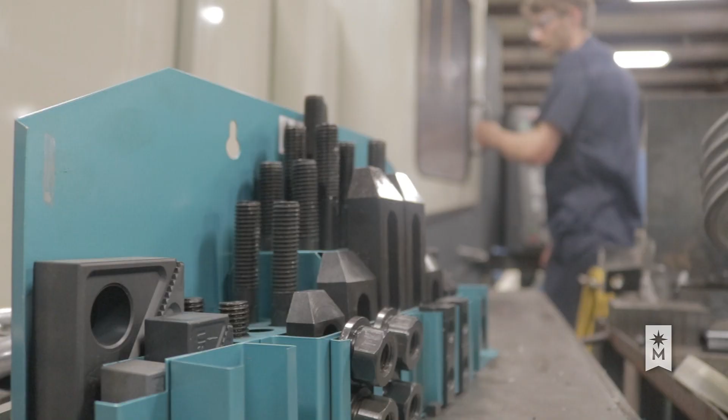We're kind of at the epicenter of engineering and manufacturing. We share a labor shed here, all along the Mississippi River, with southern Minnesota leading manufacturing jobs per capita in the state of Minnesota. The challenge is a lot of the talent leaves and goes to Chicago or the Twin Cities.

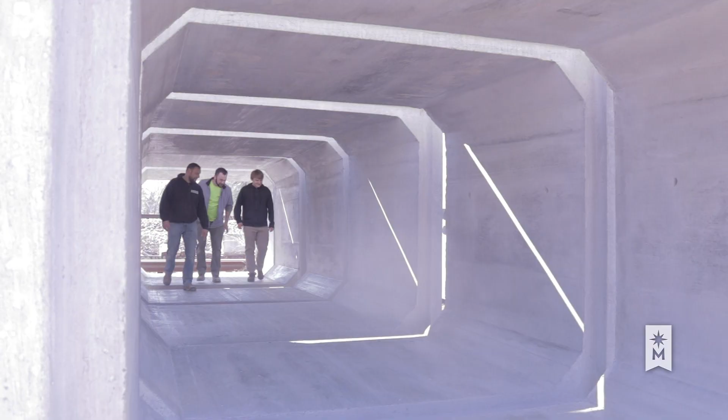If we could come up with a solution that would allow us to work with high school partners, it would allow us to build that pipeline. I want to go into an engineering field, to make connections for our students right here in this area and hopefully have them stay. And I had thought engineering was something interesting and cool that I could do. The Shark Tank pitch was the Student Learner Hub.

This pitch, in the spirit of the television show Shark Tank, your investor panel really are the sharks who will be making a decision about whether your innovation moves forward as one that is recommended for funding or not.

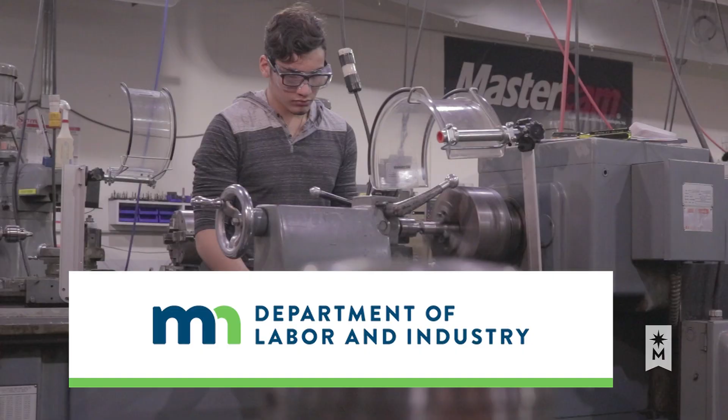We want to create a hub for student learners in manufacturing, which is the program launched by the Department of Labor and Industry in the state of Minnesota, such that our institution can function as a hub for students across southeastern Minnesota, so we could facilitate not only their education, but also a pathway into industry even before they finished high school.

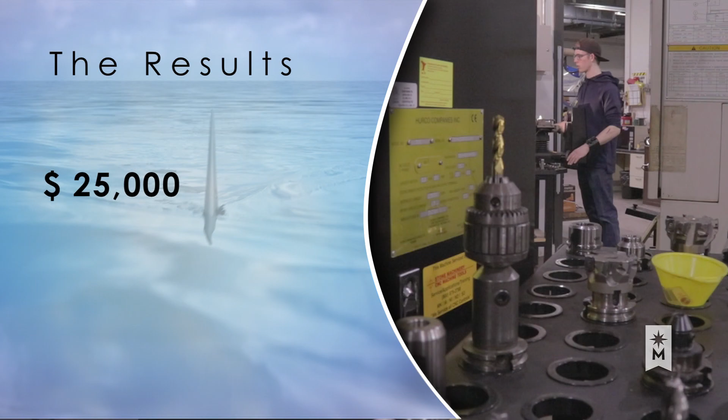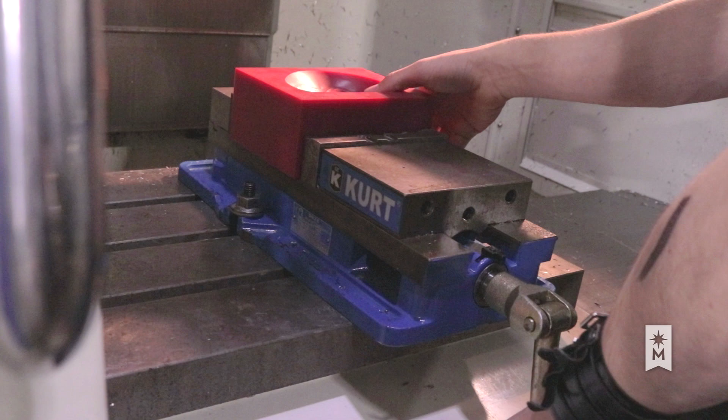We had asked for $25,000 and that was met. The funding primarily allowed us to go ahead and build that coordinator to work between industry, high school, and the college. I reach out to regional employers in advanced manufacturing seeking engineering internships for the students that are in our prototype engineering training program. The high schools are the most important partner with respect to providing us with students.

It is essentially a program that allows our students to participate in coursework at the post-secondary level while they are also a student here in the high school. It's all about finding the student's sense of purpose as well as career development.

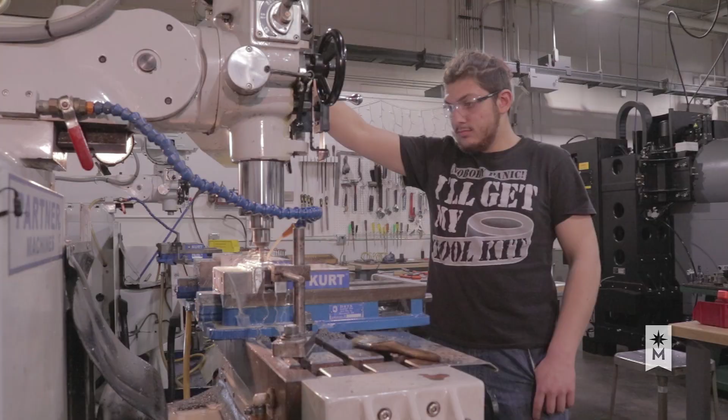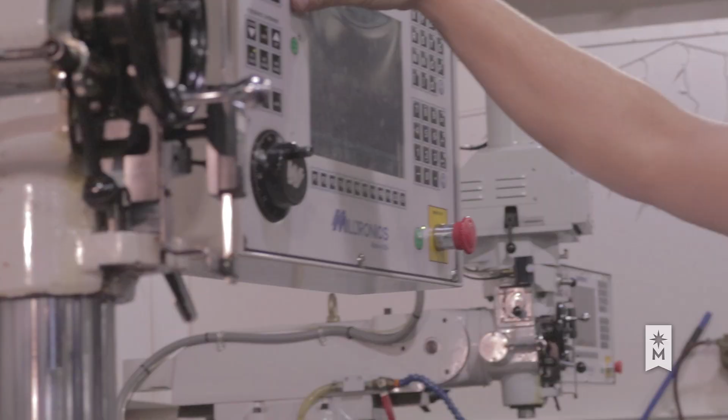Ever since I was little, I've always liked taking things apart and putting them back together. I started the prototype engineering program when I was 15. I get credit in both college and high school. It's a lot of extra work, but I think in the end it'll be worth it.

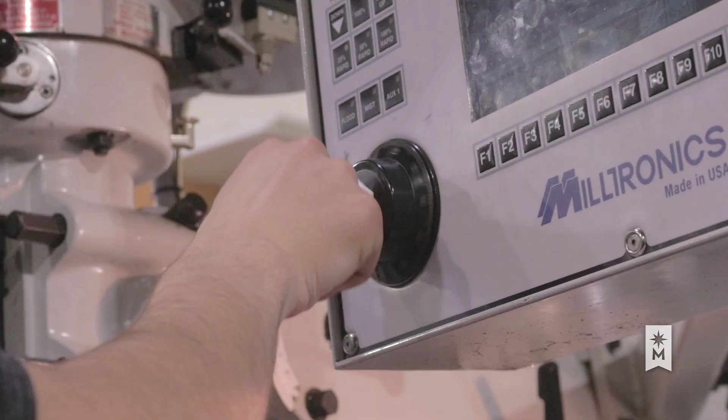The experiences that you gain here are very nice to have because the instructors will really help you get actually hands-on experience, so that looks really good for when you're trying to get employed somewhere. We get to also work with programming, which is really nice, so then you know how to actually do it when you go to a job.

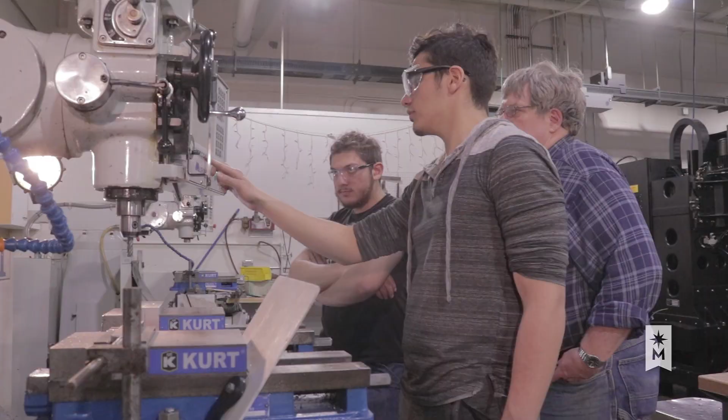I didn't really know what I was going to go into after high school, so this gave me a pretty good idea of what I could do.

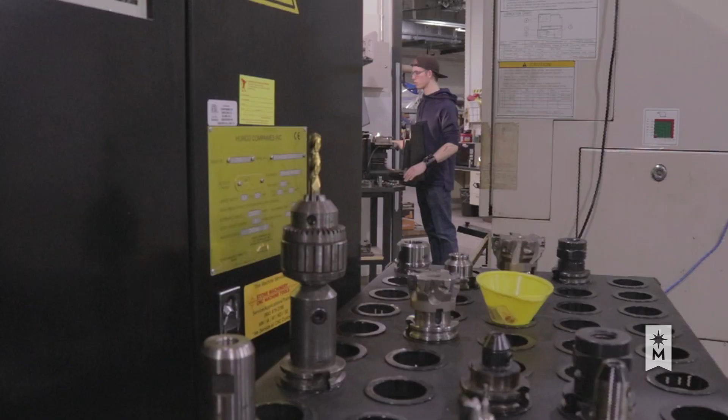So now we're taking these kids, we're cutting down the cost of education, we're cutting down the barriers to entry into college, and then we're saying not only that, but now we're going to facilitate you an engineering internship before you even turn 18. It so happens that La Crescent High School has 4 of our prototype engineering students.

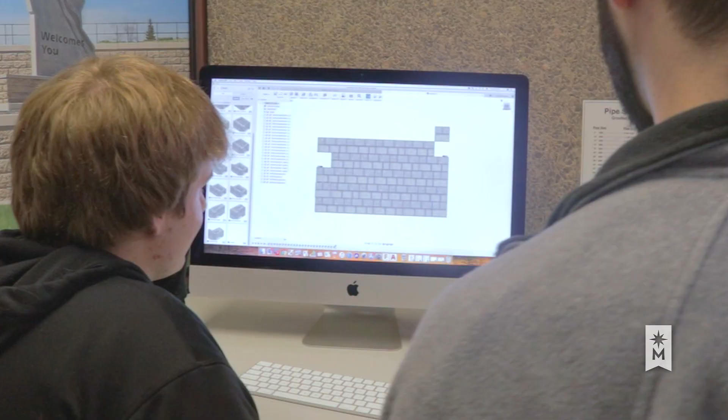One of them we were able to place with Crest Precast, which is a company here in La Crescent. They were seeking an engineering intern to do drafting. Crest Precast is a specialty concrete company. We make precast tanks, vaults, structures. We did the Welcome to Minnesota signs.

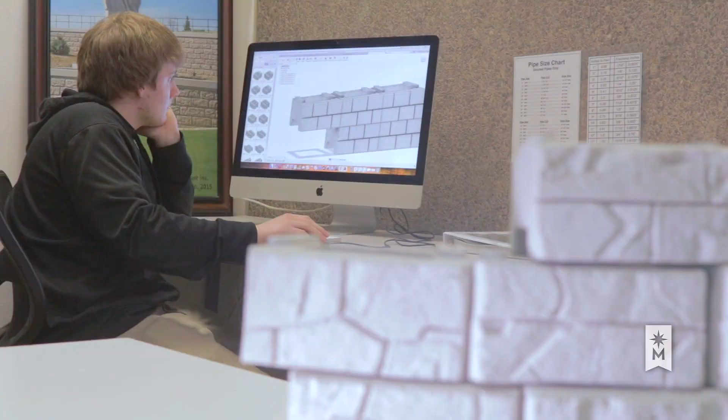We were approached by the technical college to have an intern come in, and they recommended Nick. We had him come in to do some 3D modeling for us, so he's going through and drawing up our standard products. I like thinking problems through.

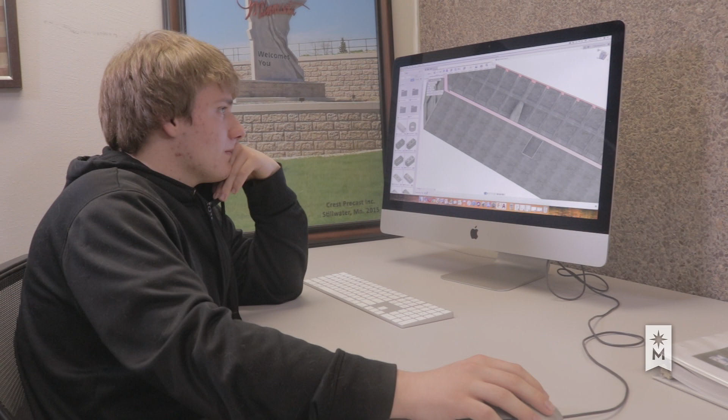We are emphasizing outreach to small and medium-sized companies who are often most invested in hiring local kids. It's great. The money really helps, although I mostly just save it for school.

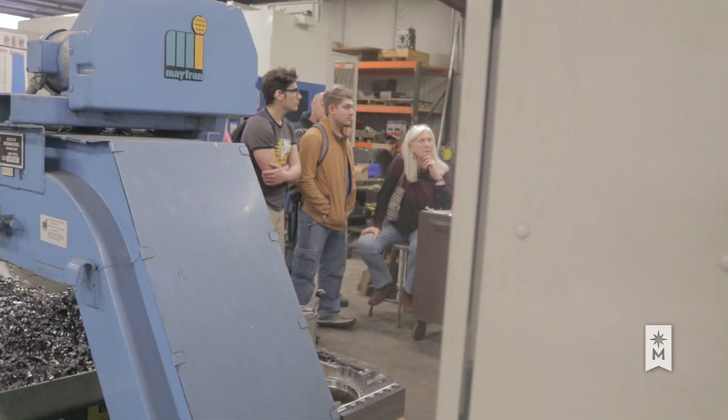Crest Precast actually introduced me to CNC Machine to have a tour. We're still a small company at 38 employees, but growing. They were introduced to Cameron, who came out of the Twin Cities. He went to Hennepin Tech College.

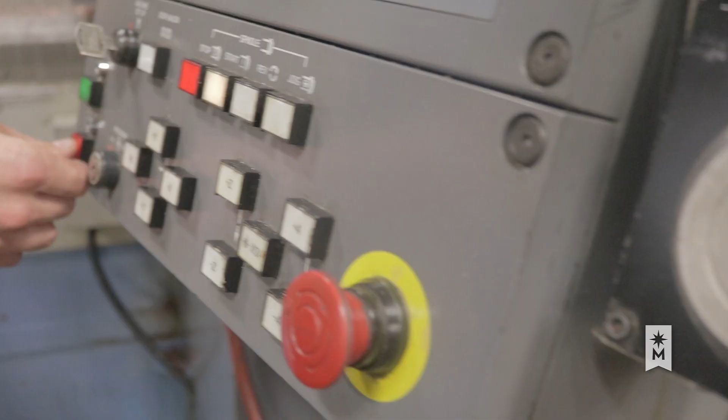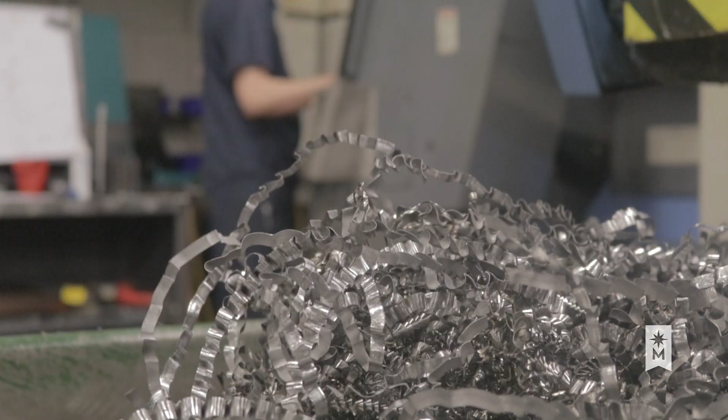Almost all of our labor is what I would call skilled labor, in that they need the technical training at the colleges. And so some of the students are coming fairly well prepared already and being exposed to how to use the equipment, to introduce students to the whole range of skills and competencies that are really required to be a part of a company which is a part of the global supply chain.

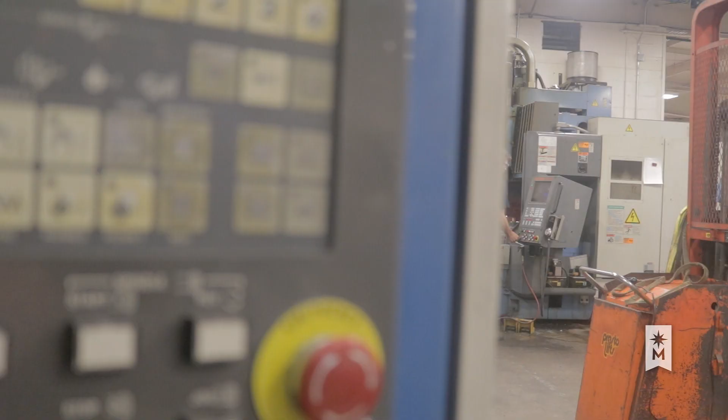We have parts that are up on the space station now. We have parts that are helping disassemble the Chernobyl nuclear site in the Ukraine.

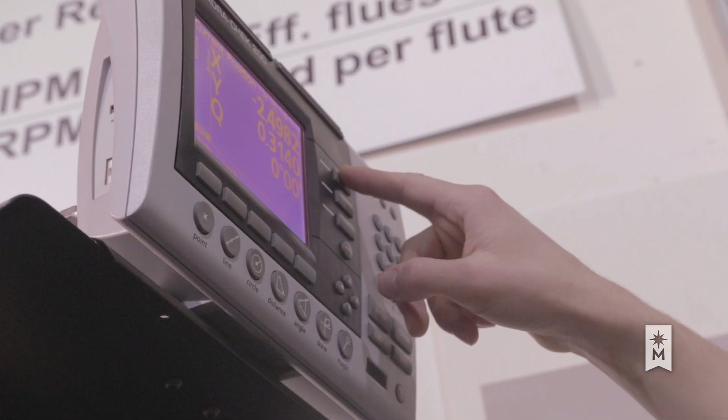There is nothing to compare with applying what you're learning in real terms. It's the most relevant experience we can give the students today.

For the future, I do plan on going to Winona State, and the credits will transfer over there. It's been a life changer for me. It really set me on the right path.